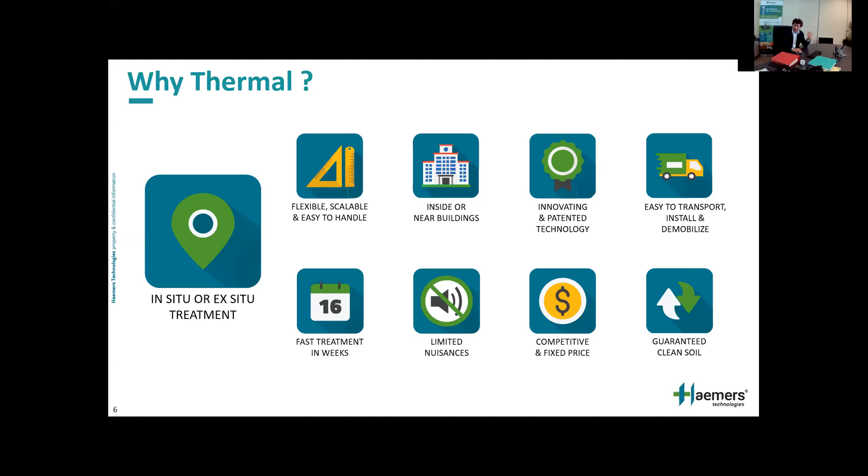The reason why people choose thermal is more or less because of certainty and predictability and the willingness to get rid of the problem quickly and in a definitive manner, not to bother about risk assessment. There is a hell of a lot of remediation that is based on risk, but usually thermal desorption is not. It's about getting rid of the source definitively, not being dependent on any future risk assessment. I think it's a pretty important philosophy in which we operate. You can either choose to manage your contamination or to remediate it definitely. That's the reason why this technology was chosen in the case I will present.

By and large, what is thermal treatment doing, and what can it do in general? It is suitable for treatment of all contaminants except heavy metals, with the exception of mercury. It's focused on treating organics, and 70% of the thermal projects in the world are done with hydrocarbons or PAHs.

Now the technology, how does it work? As you can see on the left-hand side, it's inserting heating elements in the soil. You drill them in; they're steel, and it's actually two pipes, one inside the other, with hot air circulating in the pipe, not in the open air. The outer pipe gets warmer, typically around 400 degrees, and then by conduction, the soil gets warmer and warmer.

When the soil heats up, the contaminants, or at least the volatile or semi-volatile ones, vaporize. They need to be collected, or they would go anywhere else. So there's a separate vapor extraction network, not to be mistaken for soil vapor extraction. It's a vapor extraction at very low negative pressure that recovers those vapors from the soil so they don't condensate back or go elsewhere.

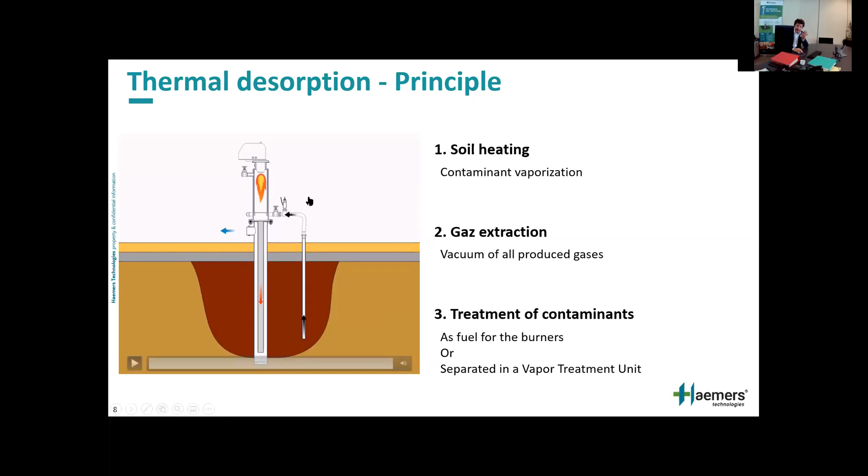That's in a nutshell how the process works and how it's been applied. I'm glad to see that many recent publications have ranked this technology as top, number one, as the most sustainable technology when you take sustainability as a whole—not just carbon footprint, but social aspects, the fact that you can completely reuse the soil, the effectiveness and speed. The overall impact has put this technology as if not the, then at least one of the most sustainable of all.

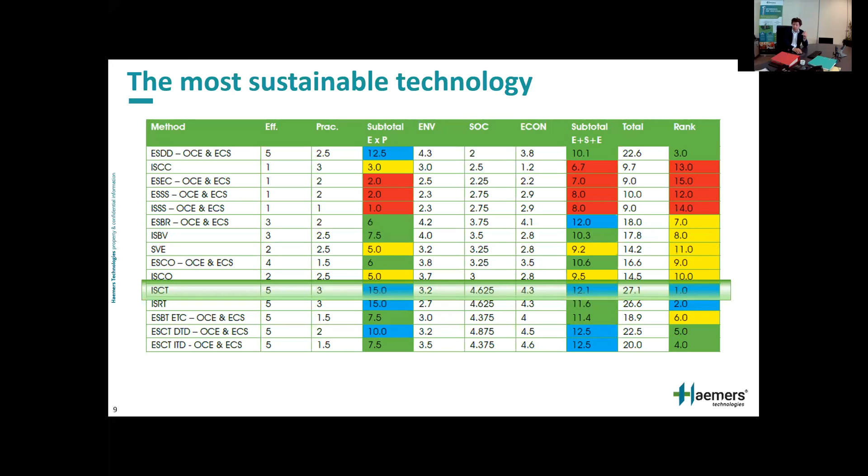A new owner comes in and says, I'm going to buy the house. There is a regulation that says you cannot buy property without looking at the soil, and the government tells you whether you can or cannot buy it. In this case, there was a risk of contamination. They did the investigation, it was contaminated, and remediation needed to be done before the transfer could happen. In this case, a transfer could happen, but a bank guarantee was put in place so the remediation would take place. The choice of thermal was pretty straightforward.

The new owner wanted zero contamination left behind, so there is a level to achieve in the Brussels region, which is, call it by and large, background level. In Italy it's called Tabella A, and here it's category 1. Every country or region has its own qualification for that, but it says if you're below that, we guarantee there will be no further action required and no contamination left behind. So that's essentially what the target was.

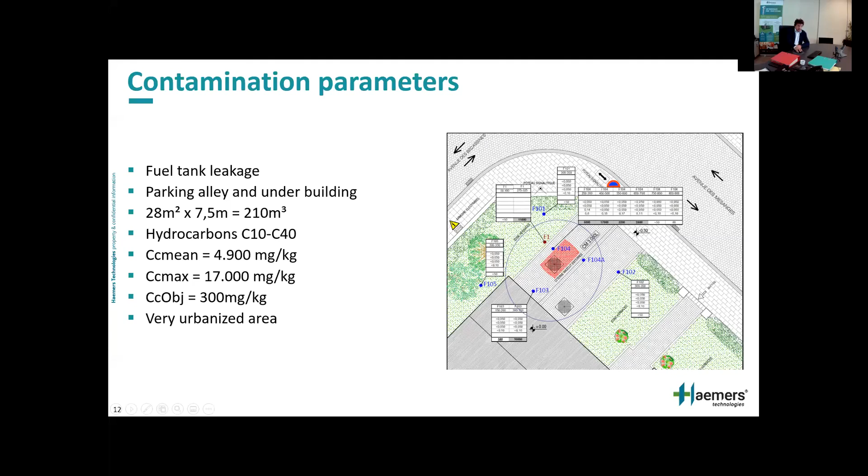So what was the solution design? 16 heating elements, 7.6 meters deep, so a little bit deeper than the lowest contaminated point. The reburn technology, which I briefly introduced a few slides ago. Interdistance, pretty short, 1.5 meter interdistance between each of the heating elements. Why is that important? The closer heating elements are to each other, the faster it goes, and the more effective it is from an energetic standpoint.

Now, of course, the closer you put them together, the more drilling you need to do, so the more expensive it becomes. So there is an optimum, and the optimum is usually close to 1.5 meters if you heat with, let's say, burners. If you start to heat electrically—not to be mistaken with resistive heating, but conductive heating electrically—you have the same rule, but there is not as much electricity available.

Whereas when you work with natural gas, which was the case here, you don't have an issue with availability of energy. There's been some diagonal drilling, meaning there was contamination under the house as well that needed to be removed. So you'll see some of the drillings were done from the outside under the building, and the target temperature was 250. How is that decided?

Essentially by lab tests or kinetic tests, where temperature and residence time are essential to guarantee that there is no, in this case, fuel oil left behind.

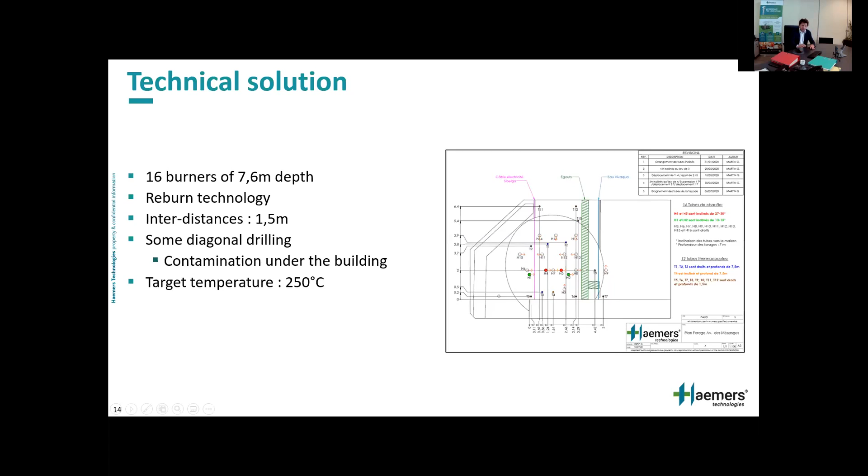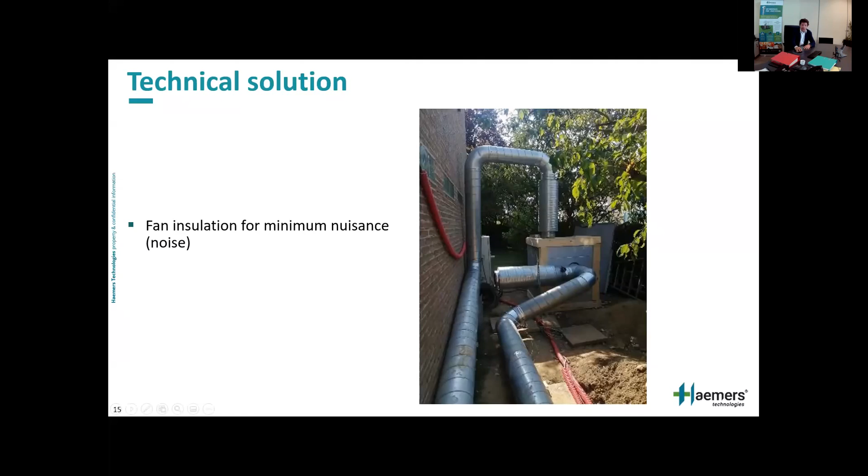Results. How long did it take? As you can see, it started September 16 and ended actually end of October. So it's 45 days of treatment total.

So as you can see here, we stopped, and what you see is that the main driver of remediation progress is temperature. You see the temperature in the soil after a few days already reaching 100 degrees, and in every in situ thermal remediation we see a plateau at about 100 degrees, just the time it takes to vaporize all the water in the soil. During that period, there is also hydrocarbon removal, but the main process is water removal. Once it's dry, you can see temperature going up and up and reaching the target temperature of 250 degrees.

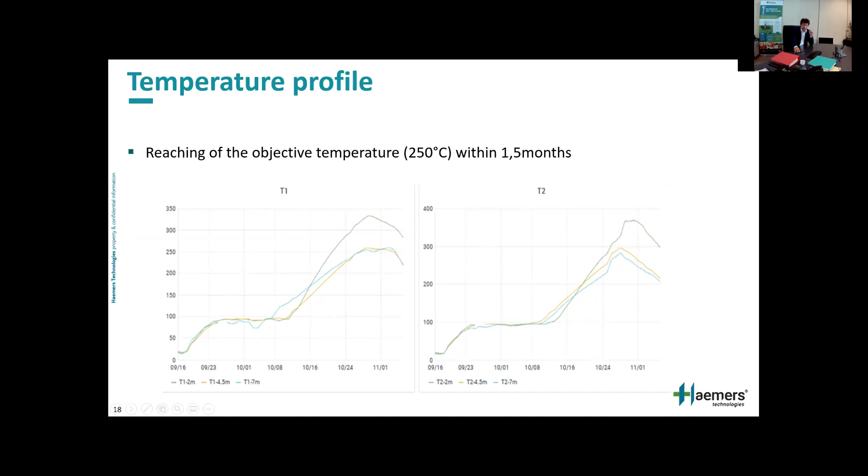Then it's shut down, re-moisturized. Water is put back in place to guarantee that the soil is as it was before, and also for stability reasons. Control sampling is done by an external firm, and done.

Emission controls: there is one single emission, which is the combustion gases, and of course the reburn gases go to one single point, and it has to be checked and measured. We measure it on a continuous basis.

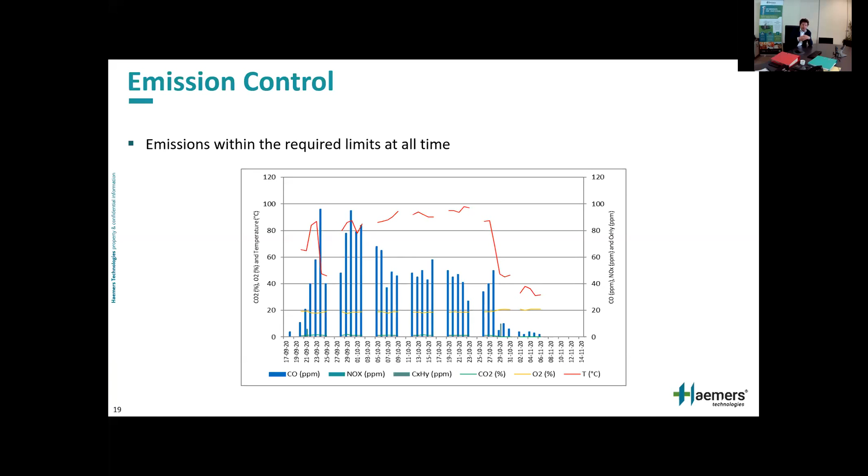The standard emission parameters - carbon monoxide, NOx, SOx, hydrocarbons - were all continuously measured and monitored by the authorities, and they were way below the norm. There's been obviously no complaints, because the environment is very, very urban, with people and kids living in the area. There's no way you could have anything smelly out of that chimney.

So essentially, this was good enough to go back into category 1 - what is also called multifunctional use in the Brussels region - and to have a new owner happy and a former owner happy and released of his liability.

So as a conclusion, in this case, and as in many cases, the thermal desorption was pretty effective on hydrocarbon contaminated soil.

All included - mobilization, heating, validation, and demobilization - was 4 months. So the owners were disturbed for 4 months of their property. There were, to say this, very, very few nuisances in the area - no trucks, no excavation, no dust, no noise.

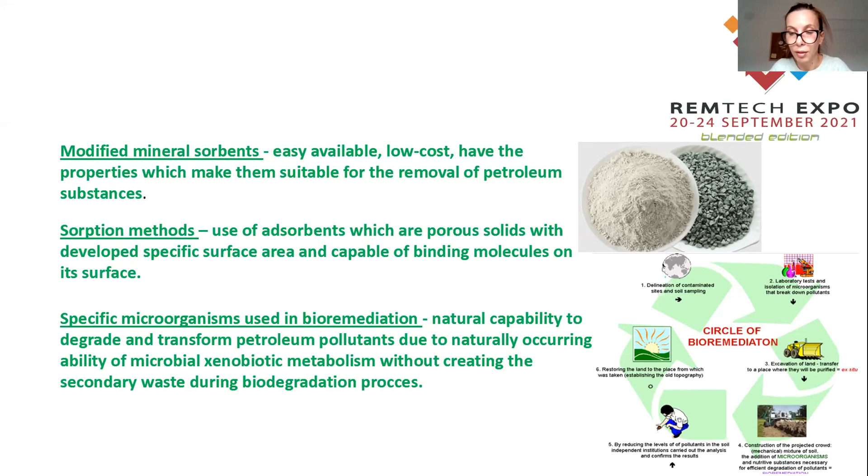So the aim of this study was to investigate the potential application of modified mineral sorbents for the removal of oil from waters. We checked two types of pollutants, crude oil and diesel oil, and two types of natural sorbents.

Organozeolite and bentonite. At the first phase, we checked the adsorption capacity of sorbents for these two types of pollutants. On the second phase, we did the biodegradation and measured capacity for biodegradation by respirometer and GC analysis. On this slide, you can see the small flow chart of this experiment.

So we are using organomineral and we absorb the pollutants onto them. Actually, we put the organomineral into contaminated water, stir it for some period of time, and after that extract the organomineral, and we are expecting that pollutants will be attached to that organomineral. After that, we inoculate that organomineral with biomass of biodegradation microorganisms.

And as you can see here, we have all circulated process, it is all in a loop. We don't have much big waste, because our idea is that we are getting the biomass from the process, and it can be used again in microbial degradation, and we are getting the organozeolite, which can be regenerated and used again in this cycle.

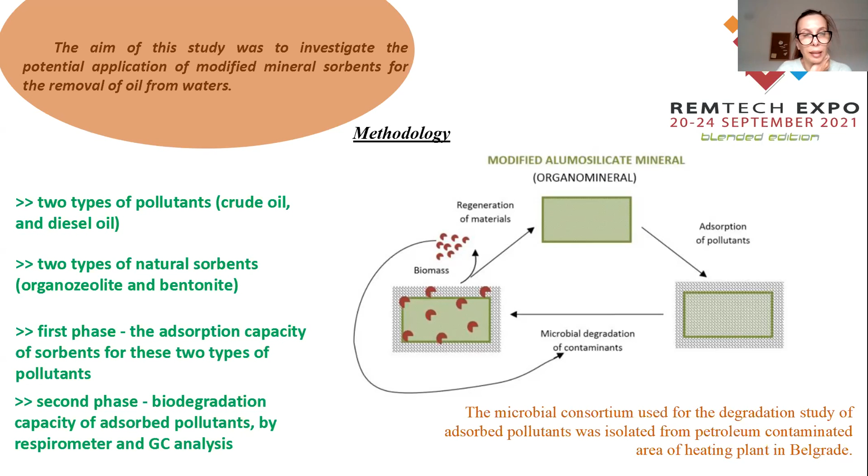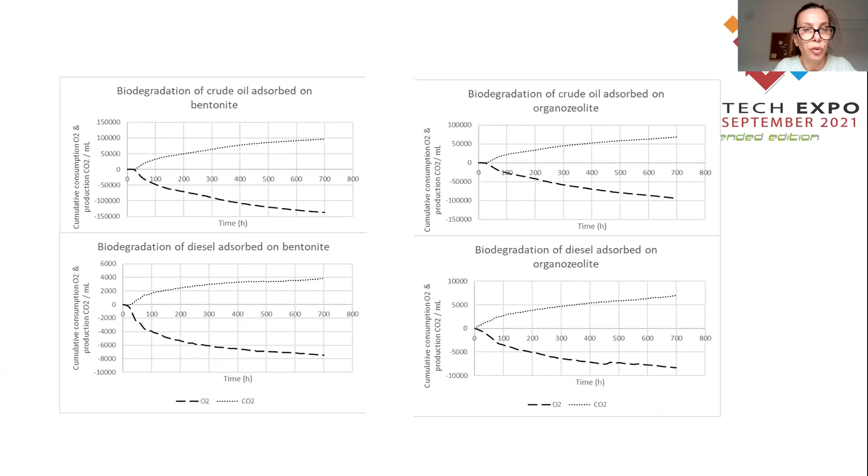So these are the charts prepared from the results from the respirometer, and they are in correlation with the previous table. They are showing the consumption of oxygen and the production of CO2, and we can see the respiration of microbes during this process. And what is important, as I said, this is just our preliminary experiment, and we wanted to check - we didn't know what we were going to get, I have to say.

Because we never used this kind of zeolite and bentonite from Serbia with our microbes. Our microbes are as well isolated from the Serbia area, but it was used for soil bioremediation and without adsorption.

So taking into account those results, we can conclude that this method is maybe more suitable for cleaning diesel oil from contaminated waters, and bentonite as adsorbent gave the best final result of cleaning capacity.

However, we need a lot of further research, and we need to find a good combination of adsorbent and pollutant to find the best match to have the best results, because adsorption properties of this kind of mineral sorbents can be modified, and that is giving us opportunity to modify it for different kinds of pollutants, and to use that way to find a good combination of adsorbent and pollutant.

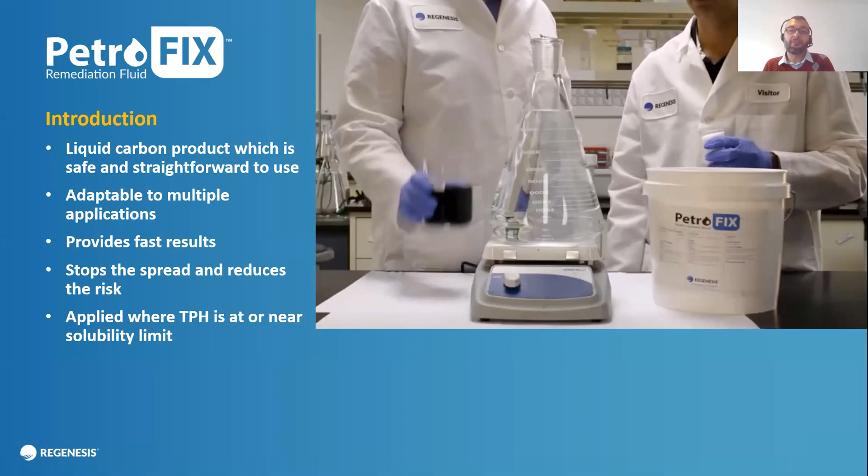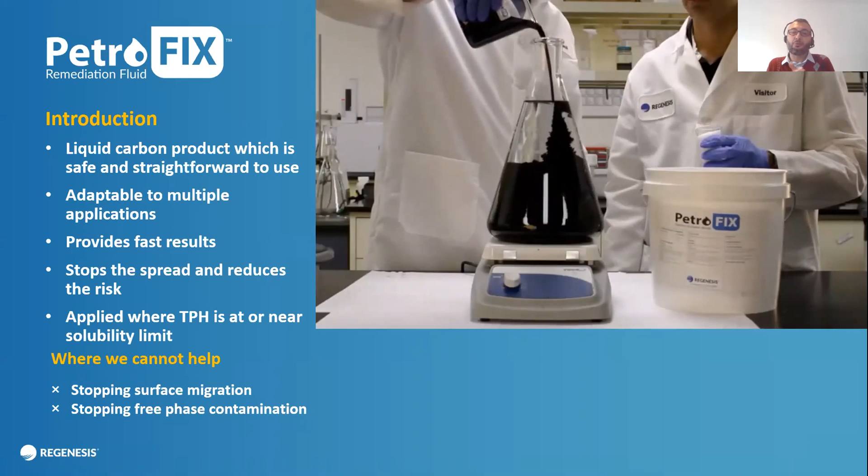So first of all, what are we talking about? We are talking about colloidal particles, very fine particles, 1 to 2 microns of activated carbon, which form a stable suspension in water. So it becomes basically a liquid. This can be applied in the subsurface, and it will move very homogeneously, and then after weeks, it will coat the soil particles.

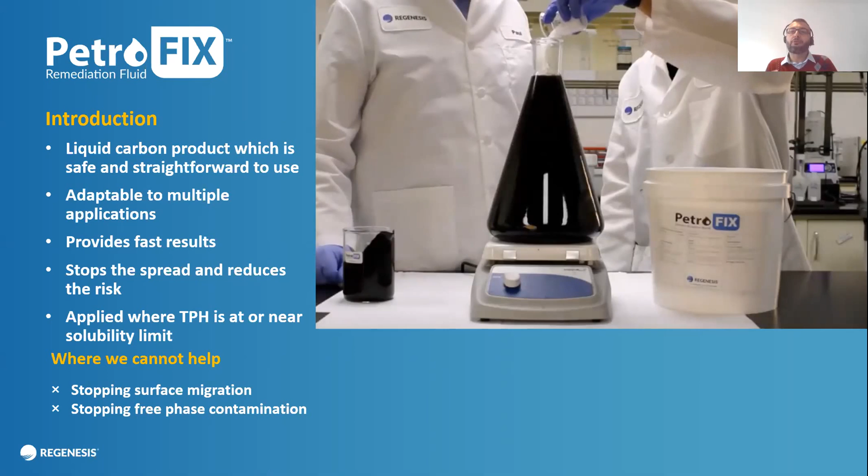From there, being activated carbon, it would sorb the hydrocarbons from the dissolved phase. The sorbed hydrocarbon is then biodegraded, and this biodegradation is promoted also by nitrates and sulfates, electron acceptors, which are included in the blend - this white powder you're seeing now in the video. This biodegradation provides self-regeneration of the Petrofix, so it becomes not consumed during the process and will stay there on the long term.

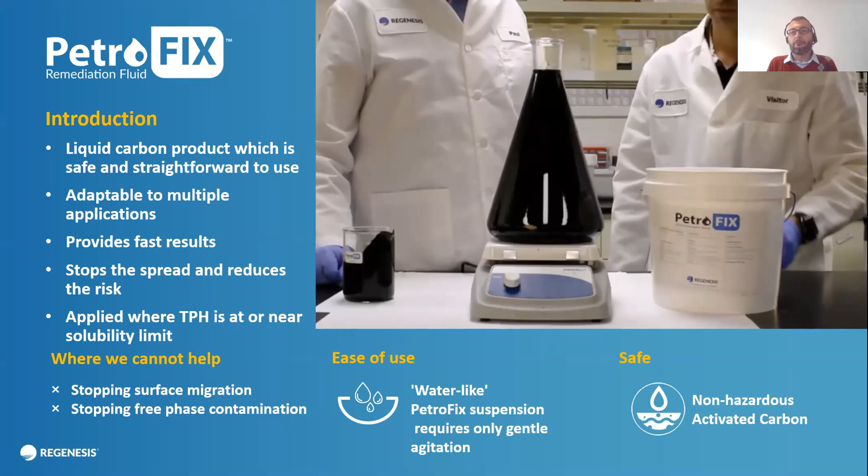This provides an easy and safe way for remediating hydrocarbons, which became very interesting, for example, for traditional sites such as petrol filling stations or other hydrocarbon sites, because it's easy to use, low pressure involved, non-hazardous, compatible with any material, and provides a long-term, completely passive management of remediation without active equipment on site.

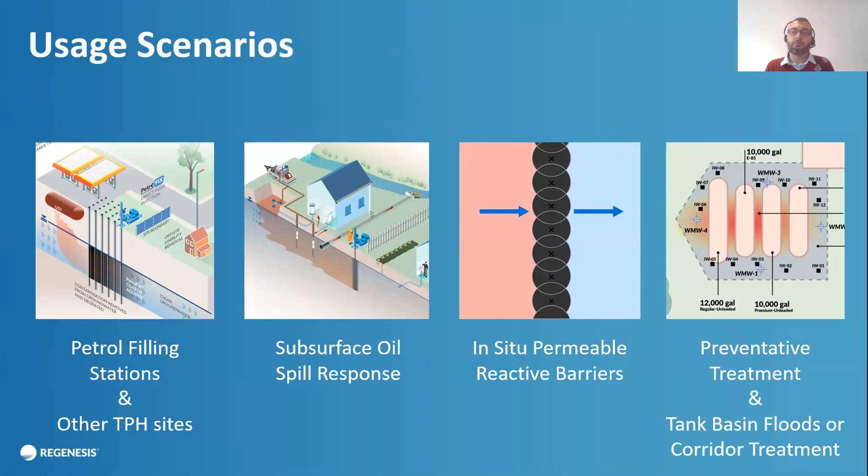Apart from that, increasing interest has been seen in the use of Petrofix for subsurface oil spill response, injectable permeable reactive barriers, and a preventative approach on non-contaminated sites. Those three scenarios are where I would like to focus today, starting with oil spill response scenarios.

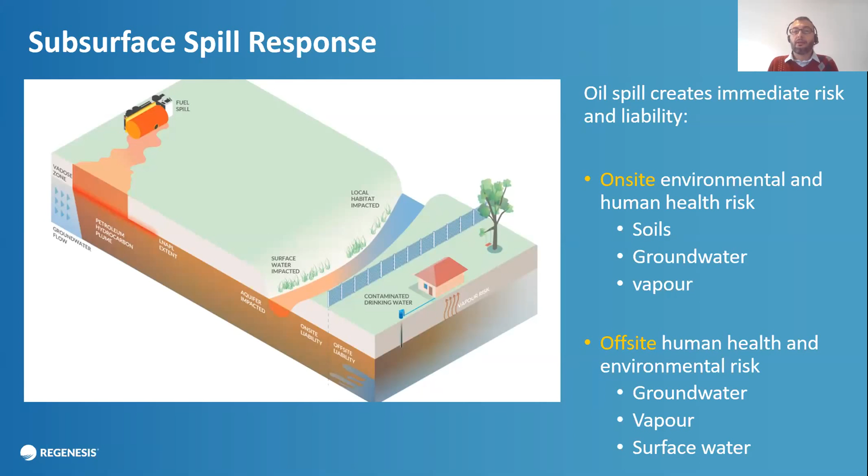Whenever a spill occurs, it is a matter of weeks or a few months before the contamination migrates, and this generates expanding risks and liabilities on site and off site. The primary spill response usually focuses on reducing the scale of the impact and removing the majority of the mass. But after the primary spill response activity, there is usually some residual mass present, which then migrates and continues to spread.

This increases the size of the contamination. And if I deal with that contamination at the remediation stage, which generally comes a few years after the spill occurs, then it's likely that the cost and complexity of this activity will be very high. So from there, the idea is to anticipate this migration, making advantage of Petrofix.

Just after the primary spill response is set up and in place, we can shortly after follow up and manage those risks and liabilities which are still under the migration process. One example could be installing a Petrofix barrier to protect off-site migration or to protect sensitive receptors. The interesting thing about it is that Petrofix does not consume over time, so it's a very long-lasting amendment.

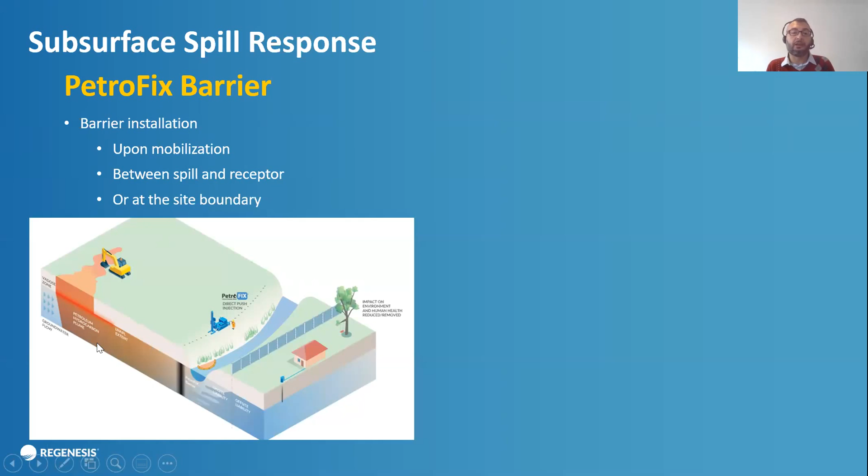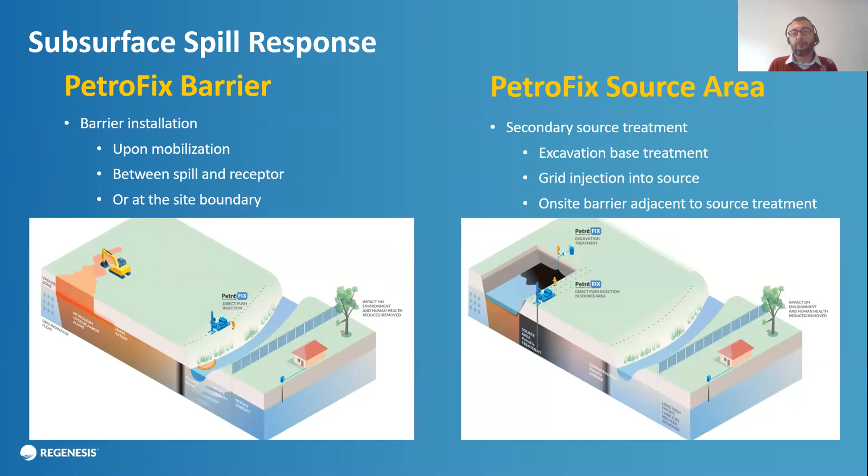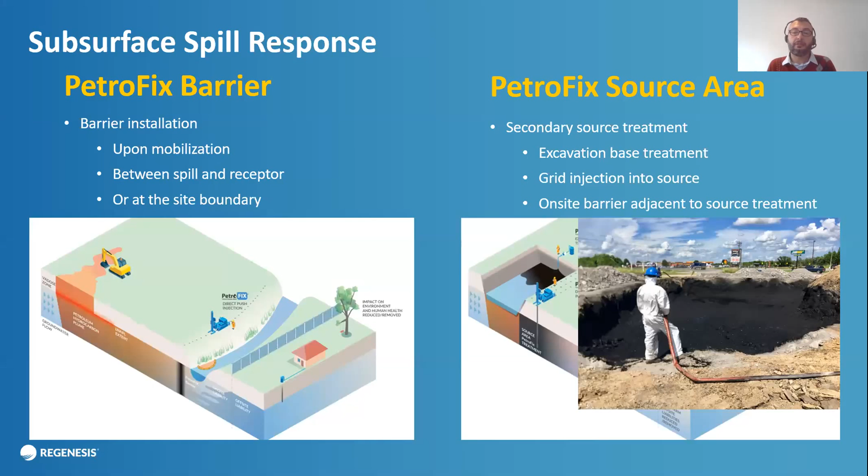Another option could be supporting the source area management with grid injection, or also, for example, with direct application into excavation. For these, it is possible even to apply this as a spray, which makes it very handy and easy to apply. On domestic oil spill scenarios, similar activities could be done.

Another option could be to implement the Petrofix into the pipeline bedding, which frequently becomes a preferential migration pathway for the contaminant to reach sensitive receptors. Here, the fact that Petrofix is a liquid means it can be inserted into those high permeability beddings with low pressure, and it will coat and permeate through the bedding, therefore inhibiting this preferential pathway very easily.

An example of this in Europe comes from SEED Environmental. This is an oil spill response company, probably one of the first in Europe to adopt Petrofix in their spill response package.

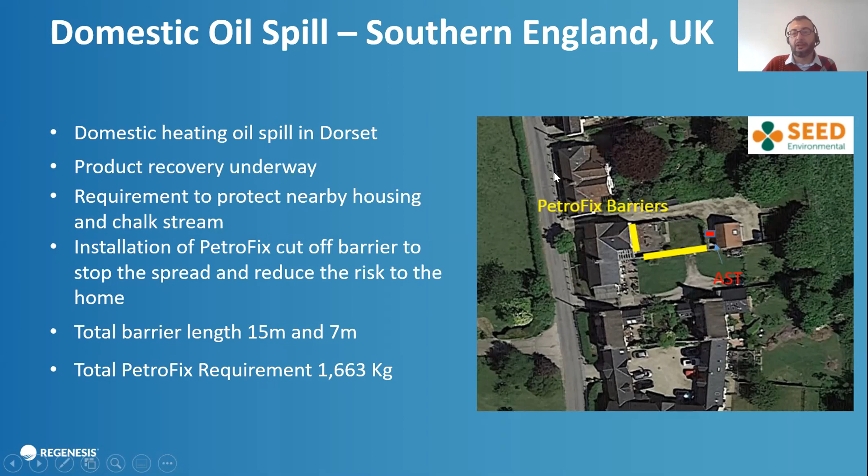In this domestic oil spill, what they did, just a matter of a few months after the spill occurred, was to protect sensitive receptors such as residential housing and a small river flowing down gradient with two Petrofix barriers.

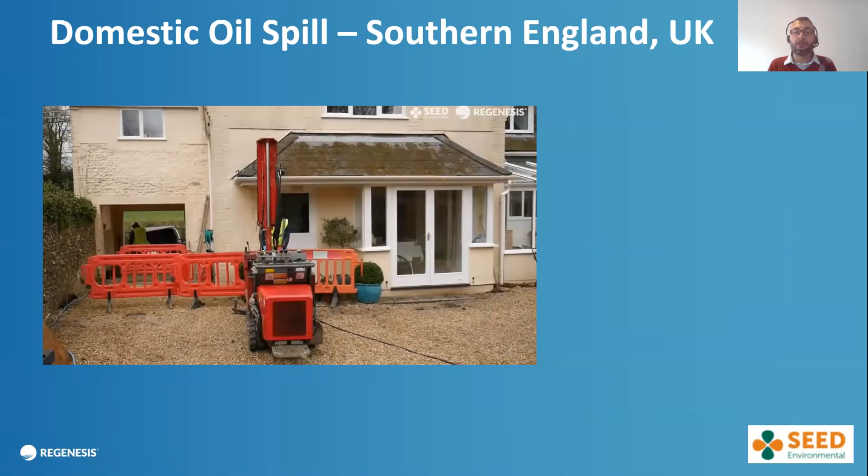And this activity is very simple. For whoever is involved with injection, it can be done via direct push, so no excavation involved, very low interference with surrounding ongoing activities, and no issues with accessibility in small areas.

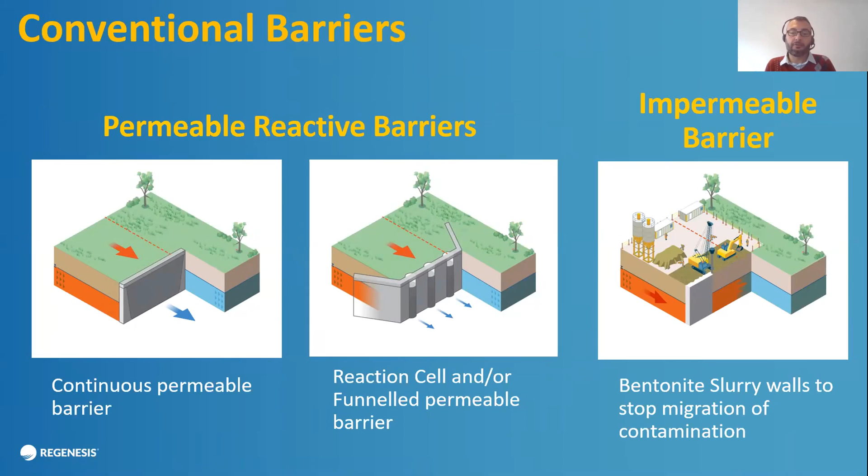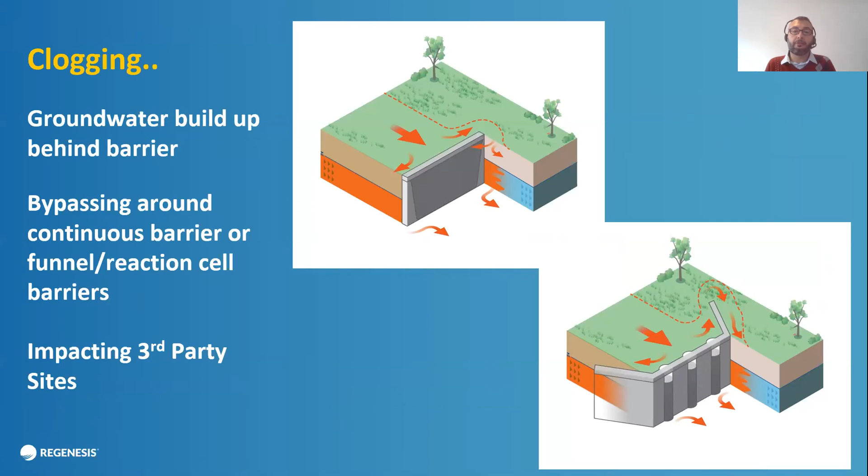Let's get now to the second scenario, which is the use of Petrofix for a so-called injectable permeable reactive barrier. Conventional barriers such as permeable or impermeable barriers are frequently used to cut off off-site migration, to contain a plume, or to confine source areas or highly impacted areas. Those usually become a very impactful intervention, and it's easy that they come to high cost. On top of this, the fact that I replace natural soil with reagent material means that I manipulate the hydrogeology.

With that, it is a potential issue that they can suffer from clogging, from bypass processes. Converting this into an injectable barrier solution provides the fact that I leave the natural soil in place, so I do not modify the natural hydrogeology. The flux and transport of contaminants will remain unchanged, and the solution, much easier especially for big sizes, can be much more affordable economically. The fact that I can use Petrofix for such scenarios provides the advantage that it's a liquid, so it's very easy to inject and distribute homogeneously. It's very likely that I can create a very continuous barrier, which is what I need for this kind of treatment. And also, because it lasts long term, I don't need to go back on site, not even after years of time. This Petrofix will manage the plume on the long term.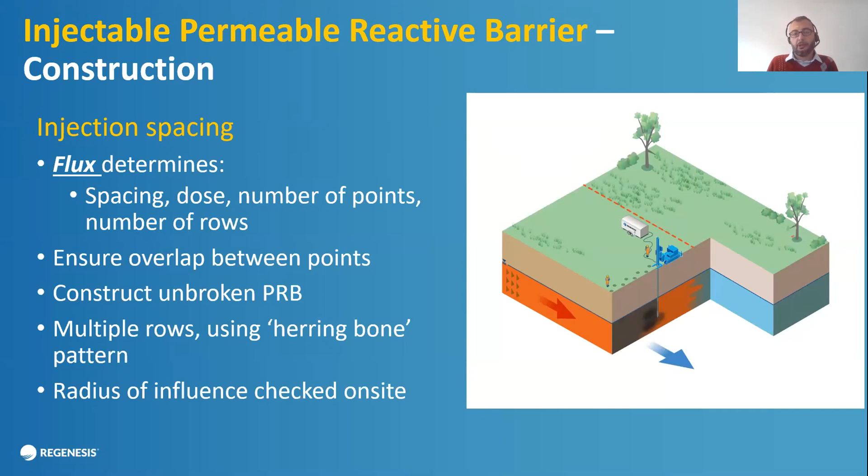On such a scenario, another example comes from the UK. This is a redevelopment site. The site was suffering from contamination coming from up gradient, from another contaminated site. The builder needed to protect their lot to avoid any risk for the new residential and commercial housing. The primary idea was initially to build a slurry wall, but the size, almost 1 kilometer, made this solution prohibitive for construction and also for long-term maintenance, because there is a need to maintain the groundwater level stable and avoid any build-up up gradient. So this was converted into a much easier Petrofix injectable barrier. This was a much more affordable process, and on top of this, the interference with building activities on site was minimal, so the two activities could proceed absolutely in parallel.

Let's go quickly to the third and last scenario I'd like to show you today. This is preventative treatment. Preventative means that I apply Petrofix in areas which today are non-contaminated. This comes from the recognition that whenever an oil spill occurs, it is likely that the majority of the mass will go and sit in tank or pipeline bedding, into service corridors. These will soon form primary and secondary sources, which will then spread into the surrounding soil and groundwater environment. So the idea is that any area at risk of potential contamination, such as UST bedding, above-ground tanks, pipelines, or any service corridors, could receive an application of Petrofix up front.

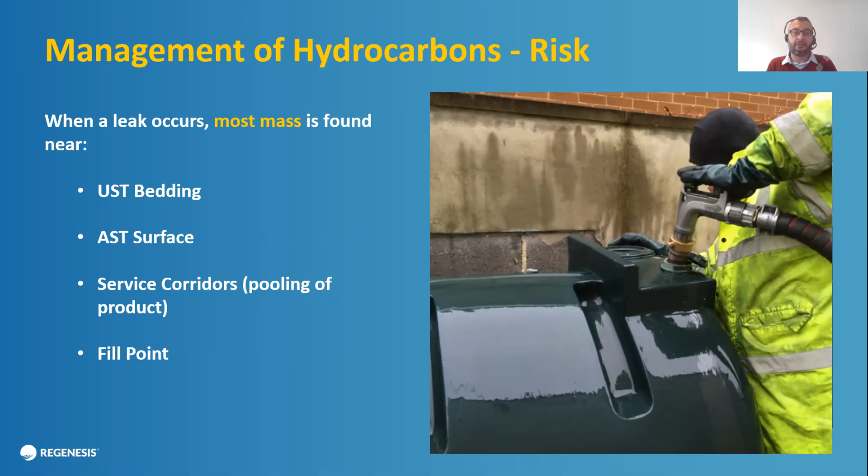Here, the advantage is that Petrofix, again being a liquid, can be spread and will distribute homogeneously in those high permeability backfilling materials, coating all the surface. Staying there on the very long term, whenever a spill occurs over time, even many years later, the activated carbon will still remain active to manage this spill. Another option is whenever, for any reason, I need to make an excavation, before backfilling I can spray apply the Petrofix on the walls and the bottom of the excavation. This will ensure that over time, the backfilling material will not risk becoming recontaminated again.

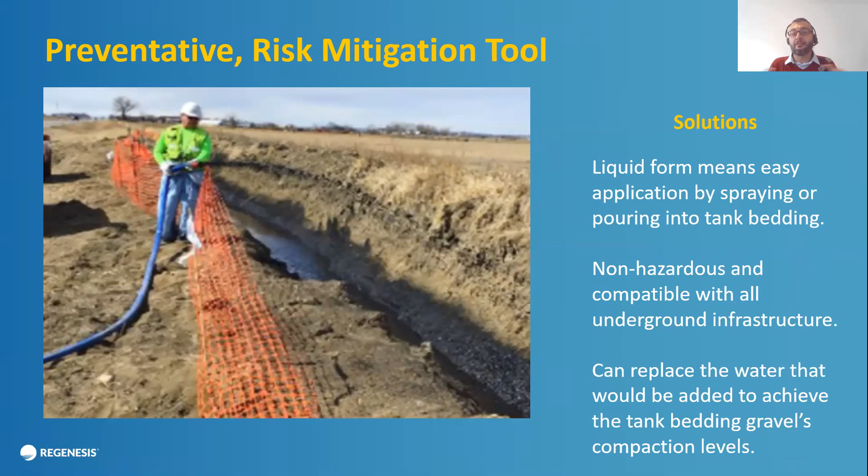And this is exactly what a client of ours did in Germany. There is a chemical plant. They needed to install a new underground service pipeline, which was passing through contaminated soil that could not be entirely remediated. So they made the excavation for installing this pipeline, and the excavation remained surrounded by contaminated soil and underlying contaminated groundwater, which over time would probably recontaminate the backfilling material of this pipeline, creating a preferential migration pathway, because this backfilling material is more permeable than the natural soil.

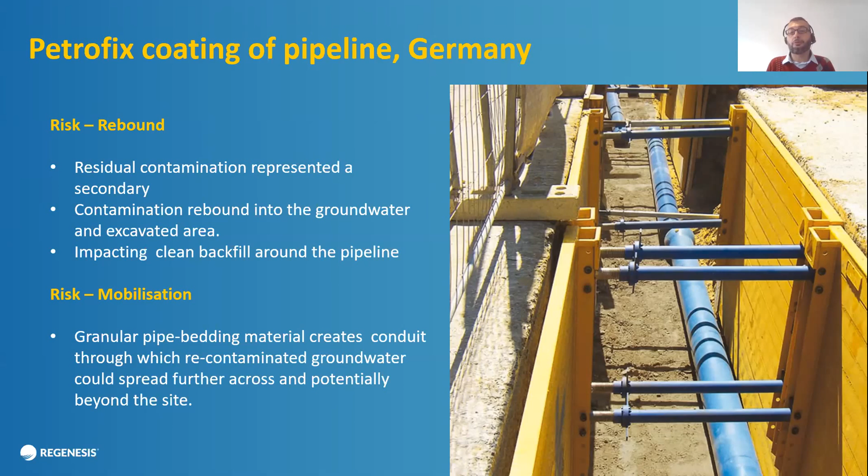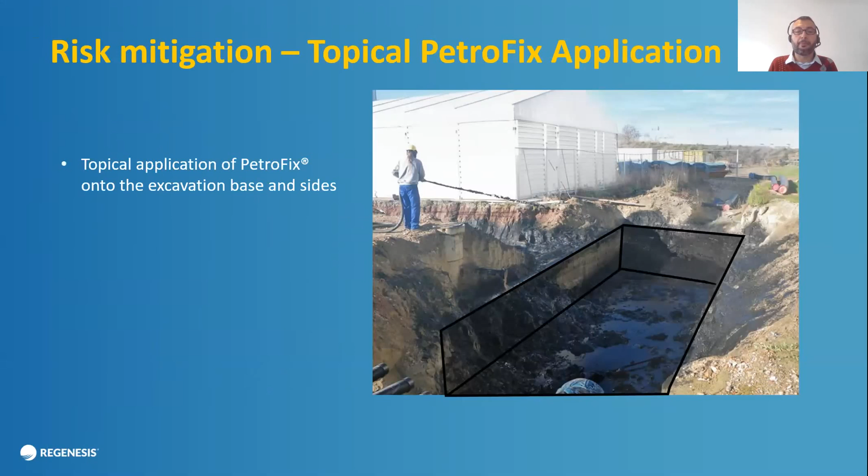So in order to avoid this, what has been done is spray applying the Petrofix on the walls and the bottom just before the backfilling. And this activity is very simple. It lasts just a few hours, and then immediately the backfilling can be put in place. It's just mixing the product with additional water, and then applying it with traditional equipment.

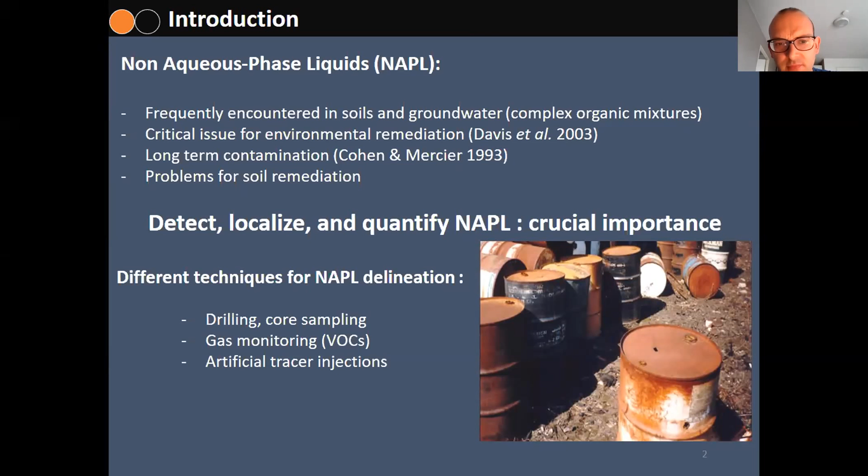Soil and groundwater are often contaminated by complex organic mixtures such as non-aqueous phase liquids, or NAPL. These liquids are recognized as a critical issue in environmental remediation and can persist for centuries in soil. It is crucial to detect, localize, and quantify NAPL. Traditionally, NAPL contamination has been estimated using drilling or core sampling, but this is time-consuming and expensive. Gas monitoring is also found in the literature, but is also time-consuming. Finally, artificial tracer injections into soil have been used, but this is also time-consuming and harmful for the environment. So new approaches are needed to detect NAPL in soil.

Radon, specifically 222Rn, can be used as a NAPL tracer. It is a natural component found in soils, a noble gas with a half-life of 3.82 days. It is easy to use because it has an affinity with the organic phase. When groundwater containing radon migrates toward a residual NAPL contamination area, a local radon deficit is observed. This radon deficit close to a NAPL-contaminated zone depends on the radon partitioning coefficient, which is of pivotal importance for quantifying NAPL in soil.

This partitioning coefficient can vary with different aspects, such as the chemical composition of the NAPL. Indeed, if it's diesel or gasoline in soil, the chemical composition will be different and the partition coefficient can vary. Evolution over time, such as evaporation or degradation of NAPL, can also cause variation in the partitioning coefficient. But no study in the literature has dealt with the degradation of NAPL and its effect on the partition coefficient.

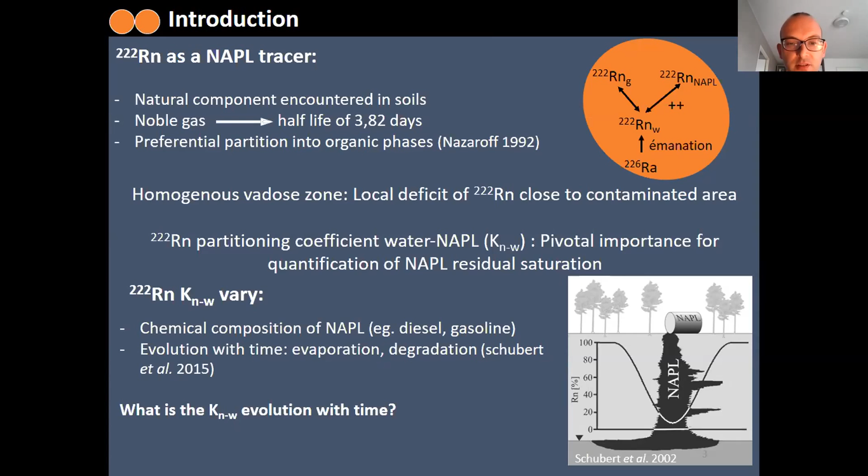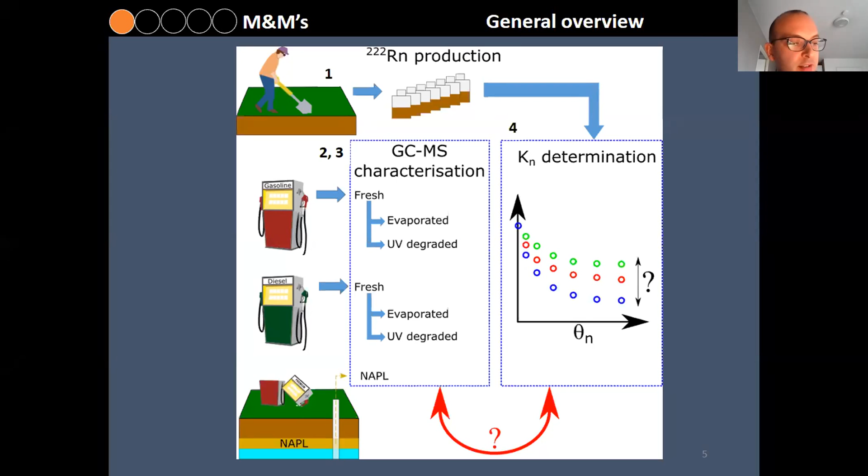To reach this goal, we performed batch experiments to determine the radon production. Fresh diesel and gasoline were sampled at several stations and characterized using GCMS to determine their molecular composition. The fresh NAPLs were then degraded through evaporation and UV exposure. Finally, the water-NAPL partitioning coefficient, KNW, was determined for both fresh and degraded complex NAPL using batch experiments.

To determine radon production in the soil, two sets of batches consisting of 6 bottles each, with different water contents, were prepared. The soil came from the same area—a pond in front of the laboratory—but two different depths were used, 20 centimeters and 70 centimeters, and radon production was calculated from these. All experiments were performed in 1-liter glass bottles, sealed with rubber stoppers to prevent any leakage. A mass of soil was inserted into each bottle, and humidification was carried out at different water contents ranging from 0 to 0.2.

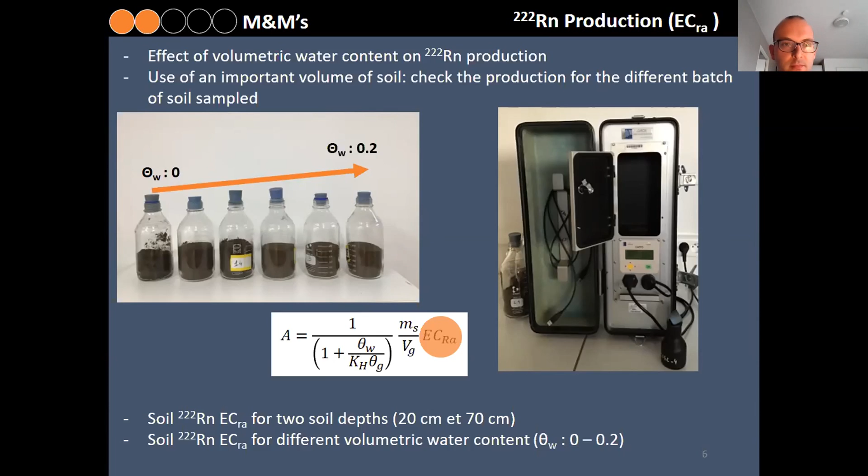After that, we realized the degradation of the NAPL. First, we bought some fresh gasoline and fresh diesel from a fuel station, and we degraded it in two ways. First, evaporation, which was just evaporation under the hood to remove the volatile compounds. And the photodegradation was carried out in a photolytic reactor, which consists of a glass bottle, as we can see in the photo, with a UV light placed close to the reactor. Everything was wrapped in aluminum foil, and the reaction occurred for 2 hours.

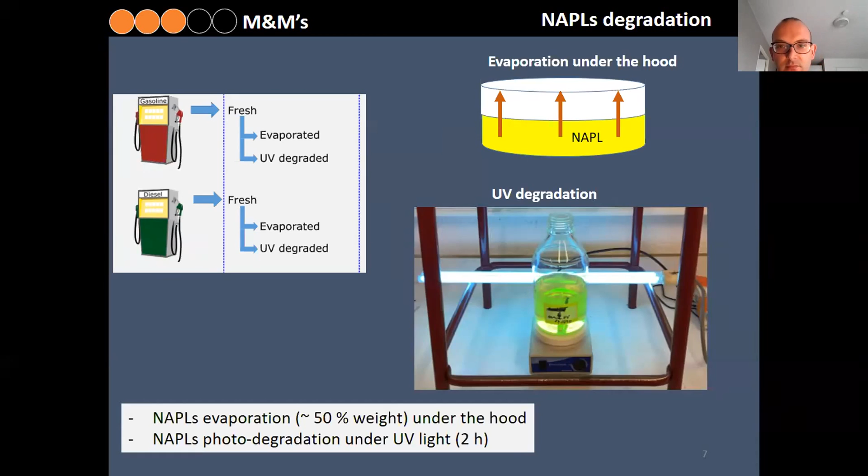To give more information about the molecular composition of the fresh and degraded NAPLs, we used GCMS, in two ways: liquid GCMS and headspace GCMS. The headspace GCMS allows us to detect the most volatile compounds and gives good separation, so it was suitable for gasoline fuel compounds. The liquid GCMS was also suitable, as diesel contains heavy hydrocarbons that are easily detectable with this technique.

After that, in order to get information about the partitioning coefficient of fresh and degraded NAPLs, we did soil batch experiments for the production of radon. We put the same soil inside the bottles and humidified all the batches to the same water content. Then we introduced the NAPL inside the bottle at different contents. After 20 days of equilibration, we measured the batch activity by removing the gas inside the bottle using a scintillation flask, and from that we got the radon activity for each batch.

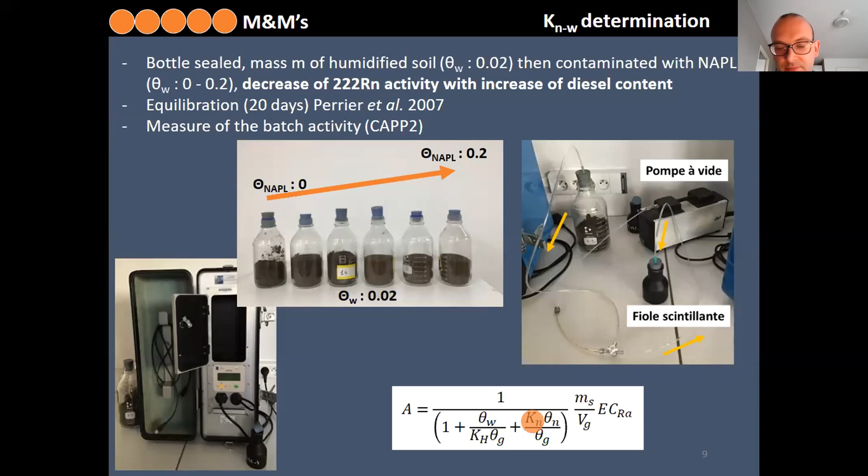So concerning the results, the first figure gives the production of radon for the different batches for the soil at 2 different depths on the soil profile, at 20 centimeters and 70 centimeters. What we can see is a rapid increase of the radon activity with the humidification of the batches, and after that we get an equilibrium at both depths. However, at 70 centimeters, the radon production is lower than at 20 centimeters.

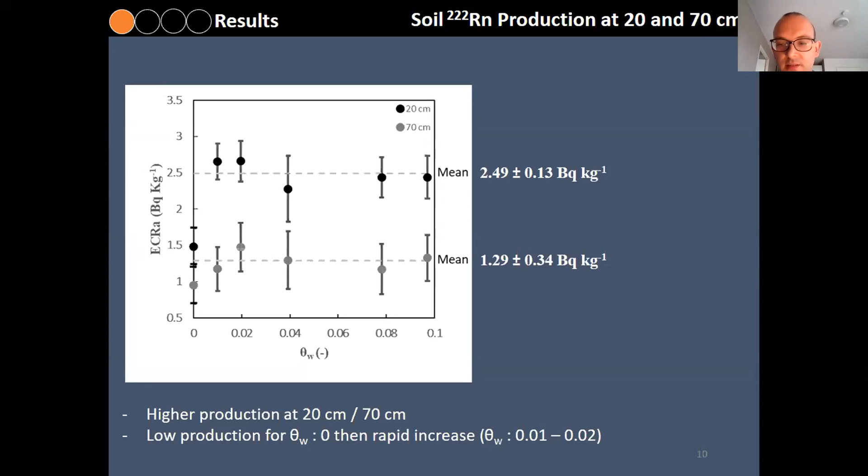Here we have the results concerning the radon activity that gives us the partition coefficient for the different NAPLs. So here we have the diesel, on the left the fresh diesel. The points correspond to the different batches, and the curve corresponds to the modeling given by the equation of the activity. We fit it at the best to get finally the partitioning coefficient. For the fresh diesel, the partitioning coefficient is 60.7.

And when we degrade the diesel - under UV in the middle, and evaporated on the right - in the middle we can see an increase of the partition coefficient, and at the opposite, when we evaporate, we have a decrease of the partitioning coefficient. So we can see that we have a variation of the partitioning coefficient between fresh and degraded diesel.

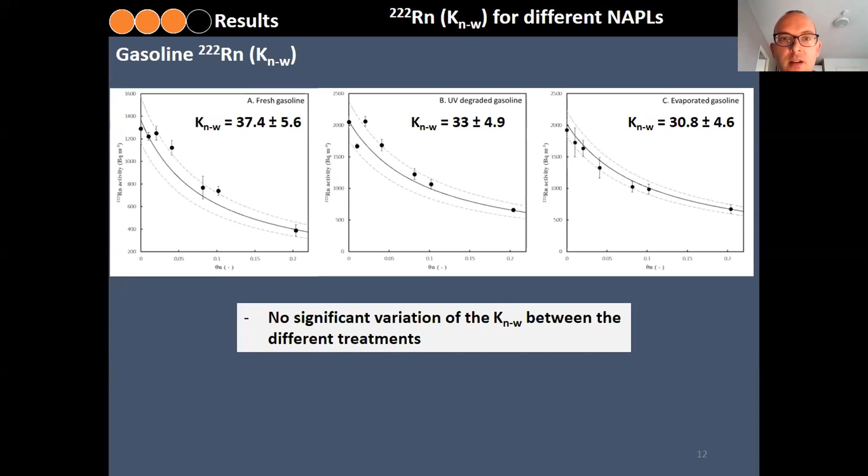Concerning the gasoline, we have the same behavior: a decrease of the activity with the increase of the NAPL. But the variation of the partitioning coefficient is lower. We do not have a significant variation between the fresh and the degraded gasoline.

So here we have the GCMS results, the headspace GCMS results - up top the fresh diesel, in the middle the UV degraded diesel, and lower the evaporated diesel. What we can see is alkanes for the fresh diesel, and some other cyclic hydrocarbons. When we degrade the NAPL under UV, we have the same peaks; we don't see the disappearance of any peaks, but the intensity of the peaks is lower. What we can see is that the UV degraded diesel is about 73% of the fresh diesel regarding the intensity of the peaks.

Concerning the evaporated NAPL, we have a strong modification of the chromatogram pattern. As we can see, the beginning of the chromatogram just disappeared, and we lost about 12 minutes of the chromatogram pattern, because of the evaporation of the most volatile compounds. When we check the literature for the partition coefficient of some molecular compounds, we can see that the beginning of the chromatogram pattern has high partition coefficients for compounds such as aromatics and cyclic hydrocarbons, and that could explain the diminution of the coefficient partitioning for the evaporated diesel compared to the fresh diesel.

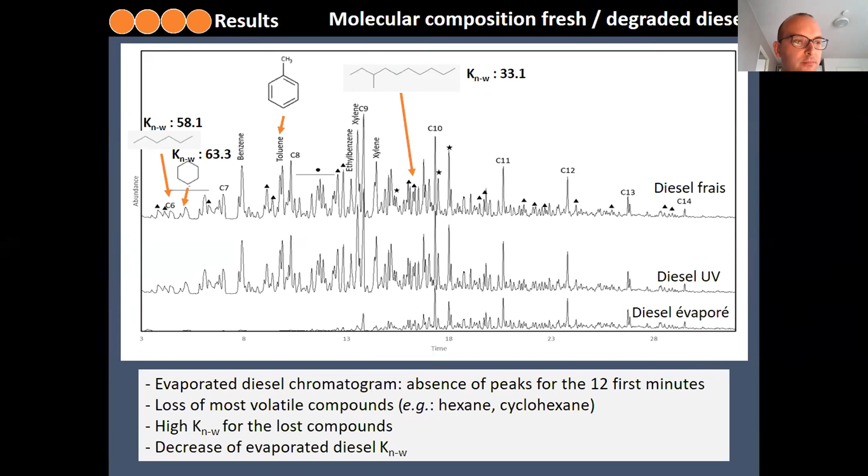So what we can say about this study is that we studied the variation of the partitioning coefficients for different fresh diesels, so NAPLs - it was diesel and gasoline - and the mixture degradation under evaporation and photooxidation.

The results show different partitioning coefficients, as we can see, for the fresh diesel and the gasoline, and it was similar to what we recorded in the literature.

However, we have an effect of the degradation on the partition coefficient for the diesel, but not for the gasoline. And what we can see is that when we lost the beginning of the chromatogram, we have all the high coefficient partitioning for those compounds.

That could explain the decrease of the coefficient partitioning for the evaporated diesel.

Concerning the molecular characterization, there is no variation of the pattern between the fresh and UV diesel. However, we lost, as I said, the beginning of the chromatogram for the evaporated diesel.

So this coefficient partition is of pivotal importance when we deal with quantification of NAPL in the soil with this technique, as this takes place in the calculation of the residual saturation.

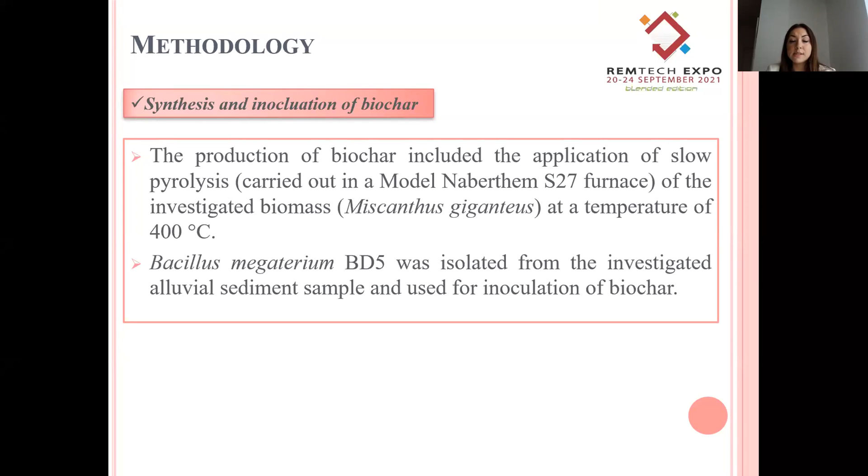And Bacillus megaterium was isolated from the investigated alluvial sediment sample and used for inoculation of the biochar.

Characterization of alluvial sediment and biochar: organic matter content of the alluvial Danube sediment was determined by standard methods.

Total organic carbon of the investigated alluvial sediment was determined by a total organic carbon analyzer.

Specific surface area, average pore diameter, and pore volume of all investigated adsorbents were determined using nitrogen adsorption-desorption analysis with an analyzer for characterization of porous and powdered materials.

Carbon and oxygen content on the surface of all investigated adsorbents were determined by scanning electron microscopy with energy dispersive X-ray spectrometry.

In this picture, we can see the column experiment with sediment, sandy aquifer material, and inoculated biochar.

The column was filled with sandy aquifer material and inoculated biochar.

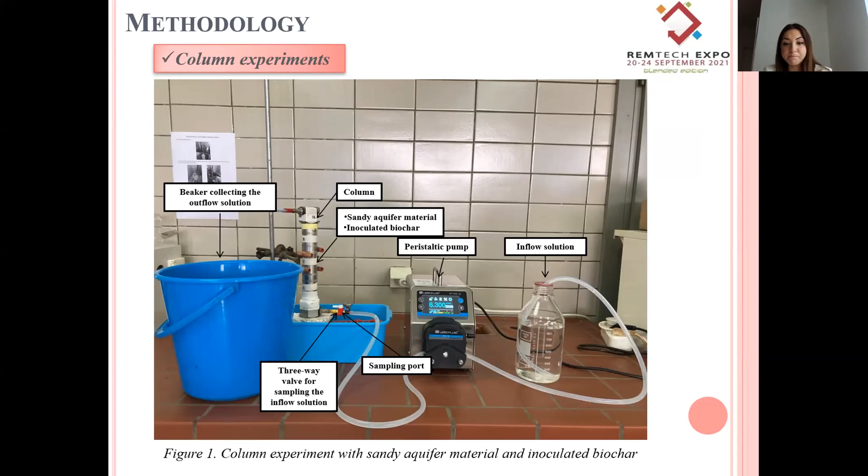Results: physicochemical properties of the used adsorbents showed that higher pore volume and carbon content were observed.

This was observed for biochar originating from Miscanthus giganteus compared to the alluvial Danube sediment.

Total organic carbon for the Danube alluvial sediment was 1.02 milligrams per gram. The Danube alluvial sediment is highly permeable soil, with grain size distribution including sand particles, fine sand, and clay.

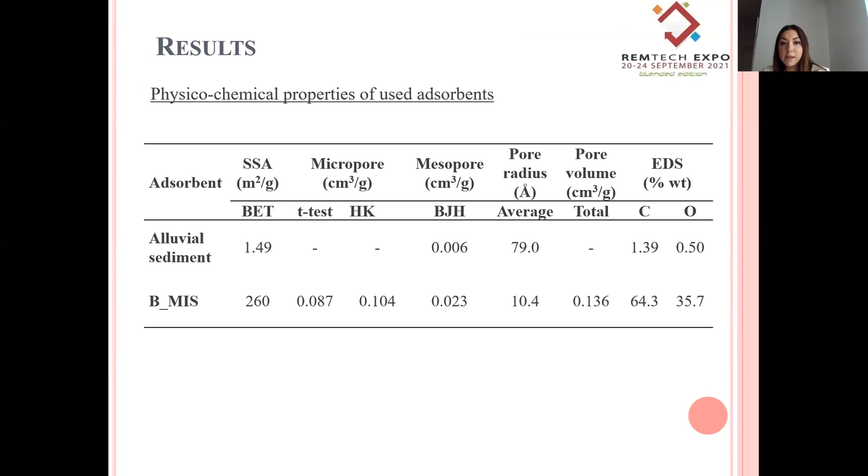Sand particles make up more than 65%, fine sand particles are 15.5%, and clay is about 10%.

This shows the absence of physical non-equilibrium processes in the porous media.

In this table, we can see transport parameters for the investigated organic compounds obtained through a column filled with alluvial Danube sediment, without and in the presence of inoculated biochar.

The column experiment with alluvial sediment showed increasing retention time with increasing molecular hydrophobicity.

The column experiment with alluvial sediment and inoculated biochar showed increasing retardation of both organic compounds with addition of inoculated biochar.

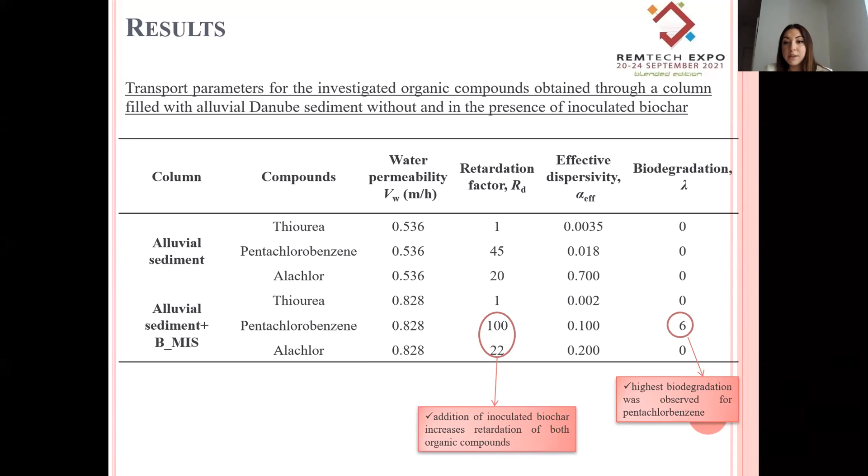The highest biodegradation was observed for pentachlorobenzene, but for alachlor, biodegradation was not observed.

Conclusions: higher pore volume and carbon content were measured for biochars than from alluvial sediment.

Transport of organic compounds through the sediment column showed that retention time increased with increase in molecular hydrophobicity, and the addition of inoculated biochar increases retardation of both organic compounds.

The highest biodegradation was observed for pentachlorobenzene, lambda is 6, which could be a consequence of high adsorption on biochar and biosorption, while for alachlor biodegradation was not observed during any of the experiments.

Overall, the results indicated that the addition of inoculated biochar to contaminated sediments has the potential as a remediation technique to inhibit the leaching of pollutants to groundwaters. Thank you for your attention.

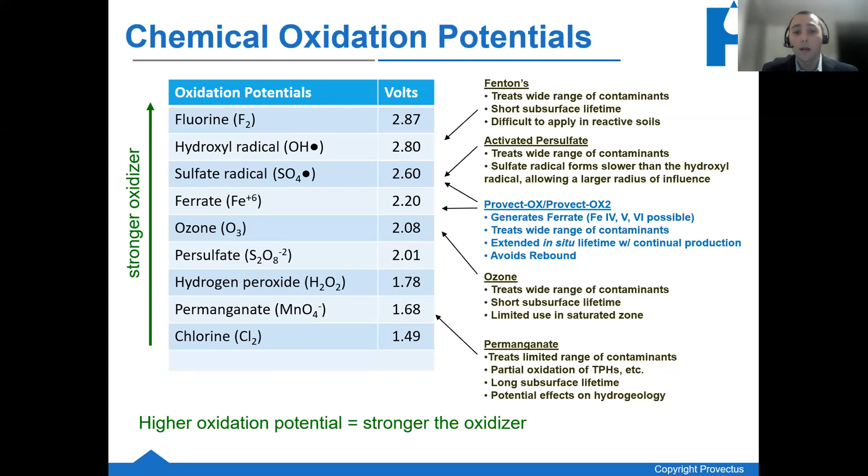As you move down the chart, you can see lower oxidation potentials for things like ozone, hydrogen peroxide, and permanganate. So how do these oxidation potentials relate to contaminant destruction? In the chart on the right, we can see our longer chain hydrocarbons like PAHs, DRO, and GRO require an oxidation potential of at least 2.5 volts to successfully remediate them.

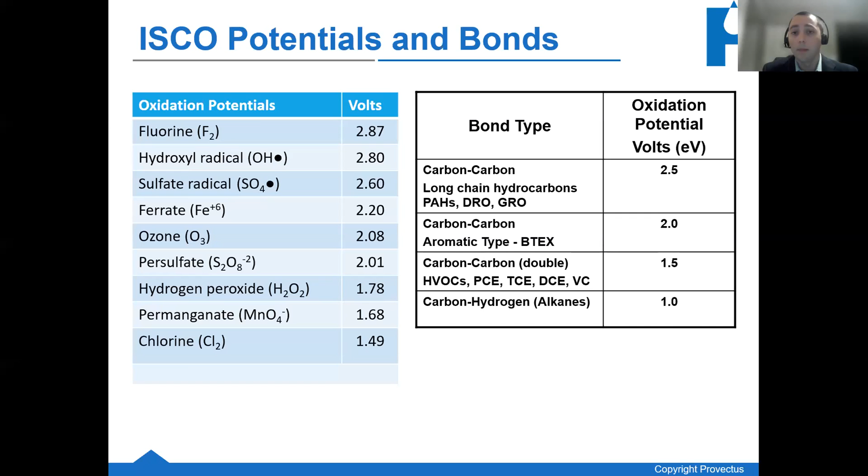In order to generate that much energy, you need to be utilizing at least the sulfate radical or the hydroxyl radical. Given some of the drawbacks for the hydroxyl radical, that's often why we're recommending persulfate to generate the sulfate radical. Some other common contaminants such as BTEX require less energy, around 2.0 volts, and chlorinated solvents down towards the bottom are about 1.5 volts. But if you're targeting those longer chain hydrocarbons, other common technologies like permanganate, ozone, or hydrogen peroxide may not generate enough energy to successfully remediate them.

Now talking about the three main limitations I see with ISCO, the first is non-beneficial consumption. When I think about the total oxidant required for a project site, this is really a mathematical formula of two components. The first is your stoichiometric demand of your contaminants. Assuming a well-delineated site where you understand soil and groundwater concentrations, you can easily calculate this for any oxidant. For example, if you have 1 pound of benzene in the subsurface, that requires approximately 50 pounds of persulfate to remediate.

The second half is harder to quantify, and that's what I call the non-beneficial consumption. This is made up of things like soil oxidant demand, metals, organic carbon, and potentially decomposition of the oxidant if using something like peroxide. The best way to quantify this is through a TOD test, a total oxidant demand test, which helps us look at all those other things besides the contaminants in order to quantify how much oxidant we need.

This is something we strongly recommend here at Provectus. Though we realize a lot of project sites are successfully remediated every day without this test being done, it's essentially a bit like gambling, as I've seen TOD tests range between 2 to 3 grams per kilogram for a site, all the way up to 30, 40, 50 grams per kilogram. If you assume too low of an oxidant demand, you may be underdosing your site. If you assume too high, you may be putting in more material than required, costing your client more money.

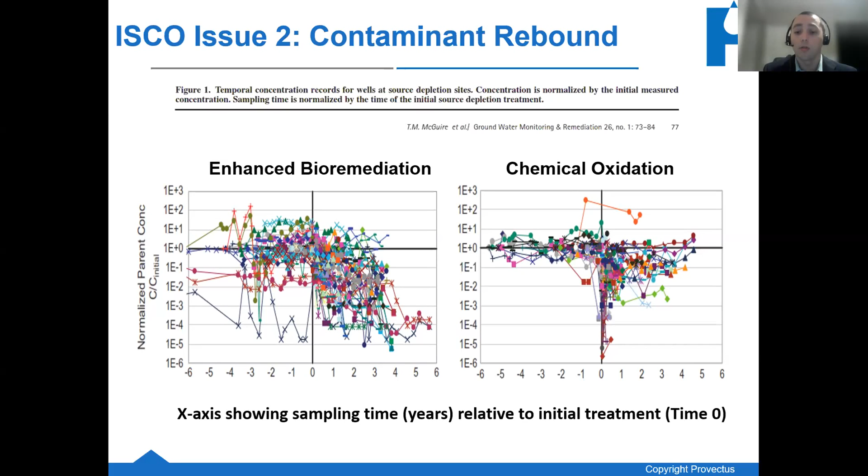As our timeline progresses, we see more and more reductions occurring. This corresponds with our understanding of bioremediation project sites, being that they tend to be a lot slower on site. The real sweet spot here would be if we could combine ISCO with bioremediation in order to get those rapid upfront reductions, as well as the sustained reductions on the back end through bioremediation.

The third issue I see with ISCO is related to the longevity of the reagents. Let's think about a hypothetical project site, where a plume's been leaking in the subsurface for 2, 3, 4 decades. Over time, that plume gets delineated, technologies get evaluated, a RAP gets submitted, and finally it's time to implement what's been approved, which may be a chemical oxidation technology. Over those decades, that plume has had the opportunity to migrate into very fine grained pore spaces in the subsurface. If we put an oxidant in that may only last minutes to hours, maybe a couple months on the high end, that may not reach every potential pore space in the subsurface.

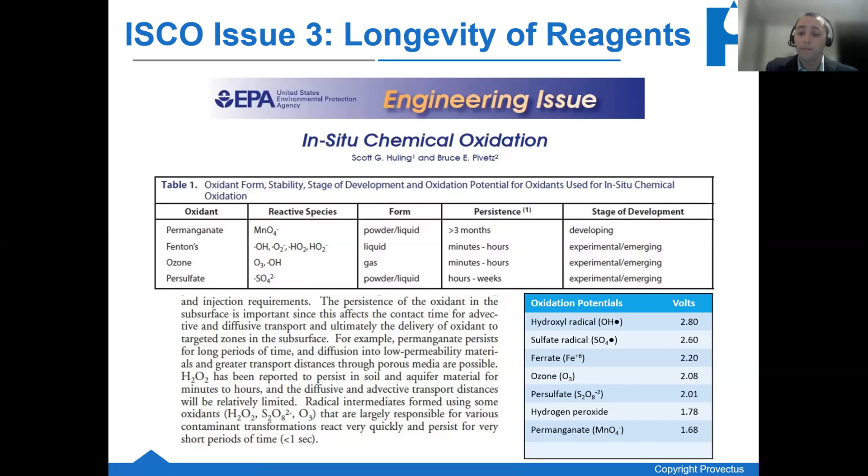Here at Provectus, we offer two technologies known as Provect-OX and Provect-OX 2. Provect-OX is sodium persulfate, and Provect-OX 2 is sodium and potassium persulfate, and both technologies come with a ferric iron activator. These technologies yield chemical oxidation via the sulfate radical as well as ferrate.

Following the application, they will alter the initial background reducing conditions, create aerobic conditions for oxidation, and as that attenuates back towards the reducing baseline conditions, the residual sulfate and iron reduction processes will remain in place to help sustain bioremediation on the back end.

As I mentioned, Provect-OX 2 is a combination of sodium and potassium persulfate. The reason we combine those two is that potassium has an order of magnitude lower solubility than sodium on site. This offers an extended release profile for the oxidant that can last for months compared to just a few weeks. In turn, in the field, this allows us to apply Provect-OX 2 in permeable reactive barriers, as well as open excavations for soil blending approaches.

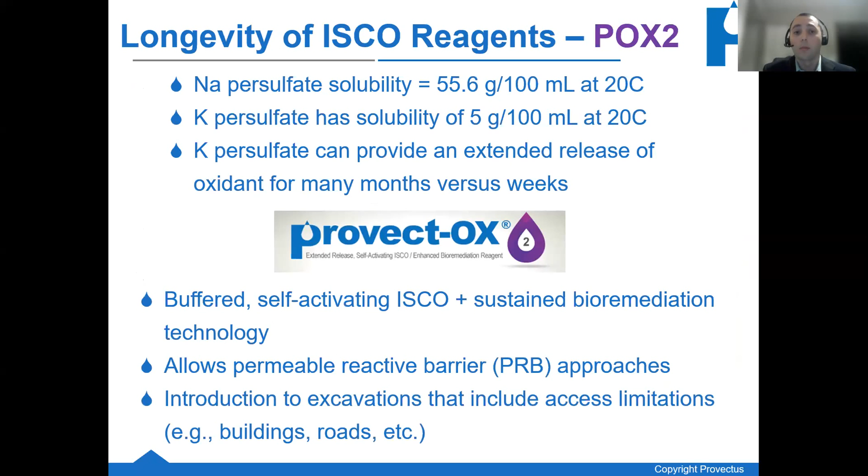Let's dive into a couple of case studies we have here. The first one, I'd like to thank Engineering and Land Planning for working with us. They're a firm based out of New Jersey, and this site's located in Madison, New Jersey. What the client did initially was an excavation of the overburden, but this was limited due to the depth and the building on site. They also performed an EFR event on the front end to remove most of the LNAPL.

What this left us with for in situ work was approximately a 1,500 square foot area, with our target vertical zone from 25 to 40 feet below ground surface. The depth to water at site was about 30 feet, so we were targeting the smear and saturated zone, and the site geology consisted of dense silts and clays. The contaminants of concern were BTEX and trimethylbenzenes, along with a little residual LNAPL in one of the two wells. We applied 8,500 pounds of Provect-OX in order to significantly reduce the contaminant mass.

One of the key takeaways is that the business was allowed to remain active and open during these injection activities.

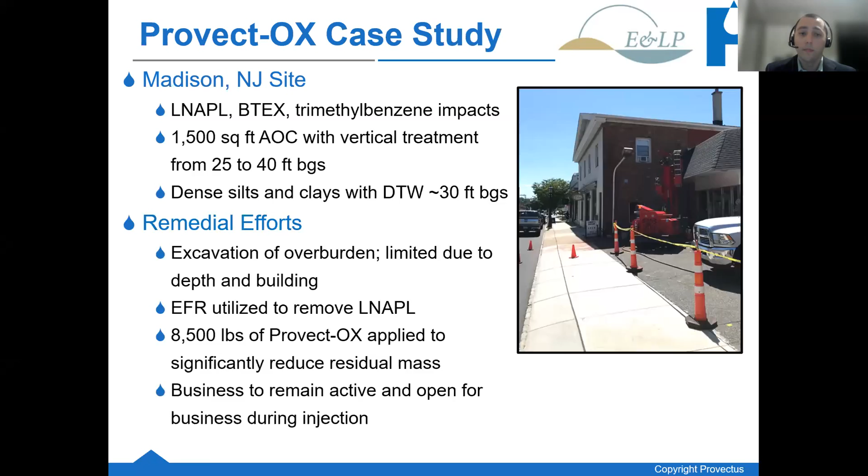Before we get into the VOC data, we do have some geochemistry. From the baseline conditions in our two target wells, we see that initial conditions were strongly reducing, with ORPs being greater than negative 100 millivolts. Following the application, the geochemistry quickly flips to aerobic, with one well going as high as plus 354 millivolts. About 3 months post-application, the ORPs return back to their reducing conditions, which is what we would anticipate based on the longevity of the oxidant. Then we'll have that sustained bioremediation with the residual sulfate and iron taking place on the back end.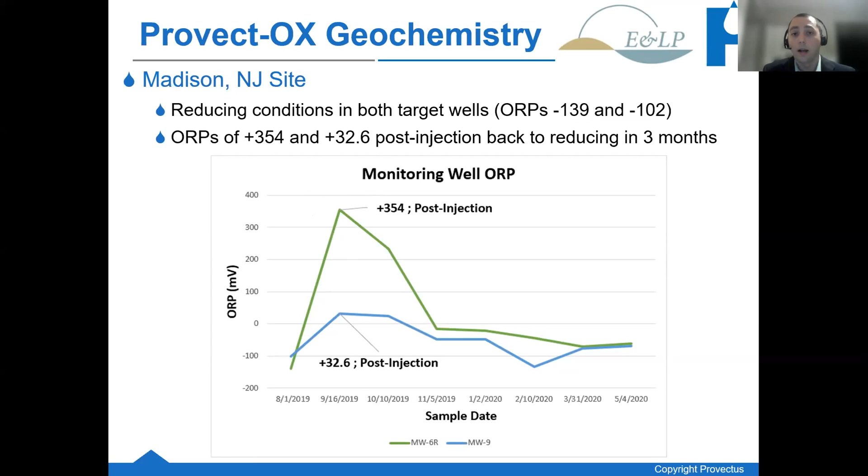Getting into some of the VOC data at MW6R, we can see reductions of greater than 90% for both BTEX and trimethylbenzenes. At MW9, this is the well where we had a little bit of residual LNAPL that was successfully remediated, and we had some higher starting concentrations here. The BTEX was reduced by approximately 96%, with the trimethylbenzenes coming down by about 85%.

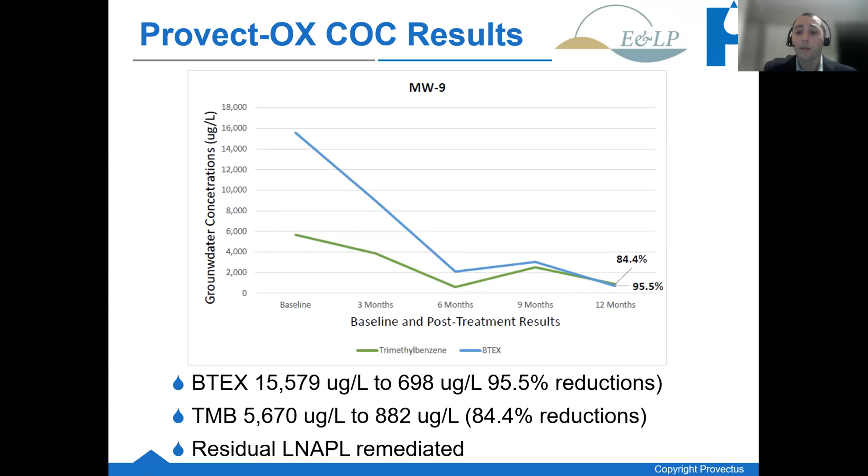The thing I'd like to note is that this is only about 12 months post-application. So even though the oxidation reactions have kind of run their course, we would still expect the bioremediation to continue for years to come on the back end.

The second case study is from a site on the east coast of the US. This was an excavation where they applied Provect-OX2 to the base of the excavation and blended that in with the residual soil and groundwater. You can see the picture here on the top right with one of our super sacks being opened and the Provect-OX2 being dumped out.

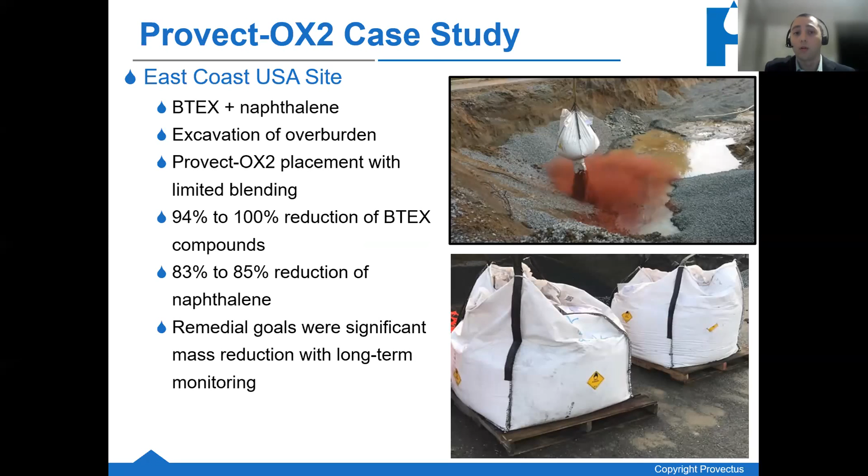We saw fantastic results at this site as well, with BTEX going down between 94 to 100% and naphthalene being reduced by about 84%. The client was very happy in the end, as the remedial goals for the site were just significant mass reduction with long-term monitoring. So I thank you for listening to my presentation today.

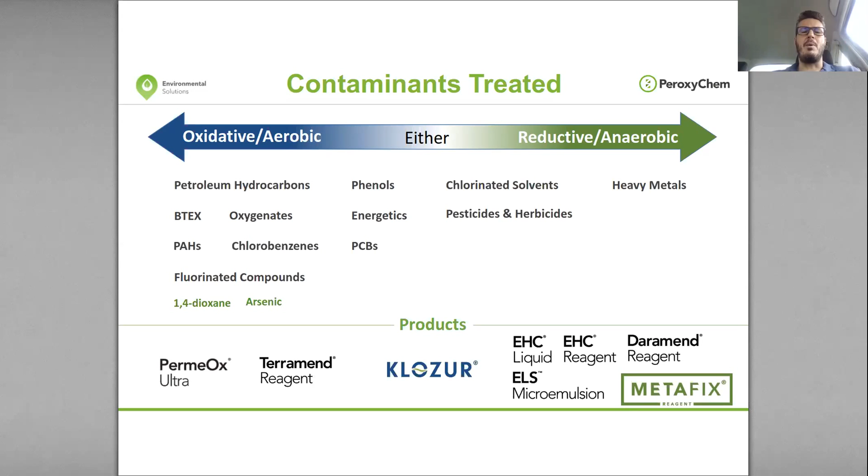In this slide we can see an overview of the Peroxychem treatment technologies along with the different typical contaminants that we can find on a site. We can observe how the Klozur technology is the one we are going to present. It's between the hydrocarbon family and the chlorinated solvent family, because thanks to the activated persulfate, we can treat both organic contaminants on a site, in groundwater, in soil, or in both components. Please, the next one.

Okay, this is the slide about Klozur. The Klozur family is based on sodium persulfate and consists of several high-quality environmental grade persulfate products used for chemical oxidation of contaminants in soil and groundwater. Please, the next one.

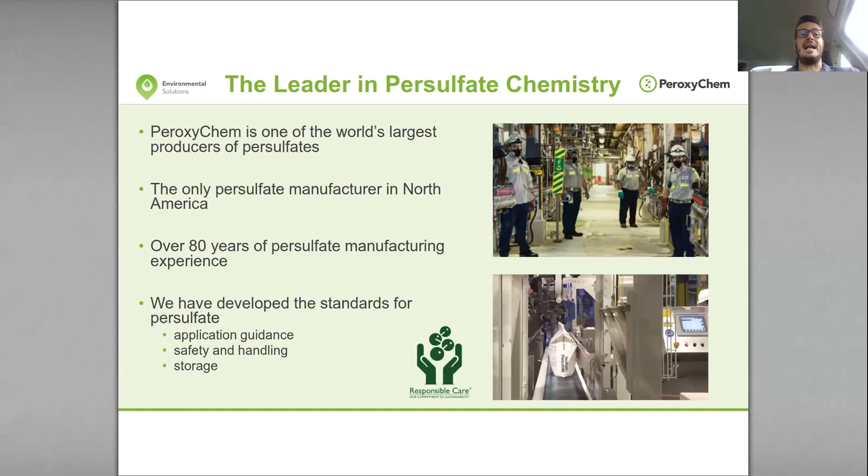We produce Peroxychem, which is leader in persulfate chemistry with patented technologies, and is one of the world's largest producers of persulfate. We have facilities in North America and in Europe, and we support clients in applying persulfate in the best way possible. Please, next one.

Here is the Klozur portfolio. In particular, we can see 4 different products. We have Klozur SP, the pure sodium persulfate. When you apply pure sodium persulfate, you need to use an external activator in order to maximize the efficiency of the reagent. Klozur One is sodium persulfate with a built-in activator, so everything is in the product and you don't need external activation.

Klozur KP is the potassium persulfate. It's a particular persulfate that lasts in the media up to 6-9 months after injection. And the last one is Klozur CR, where CR is the acronym for combined remediation.

Klozur CR is approximately 50% sodium persulfate and 50% calcium peroxide. So when you apply this product, you have at the same time chemical oxidation and aerobic bioremediation, and the calcium peroxide of the product can activate the sodium persulfate. This is the technology that has been applied in the next case studies. Please, the next one.

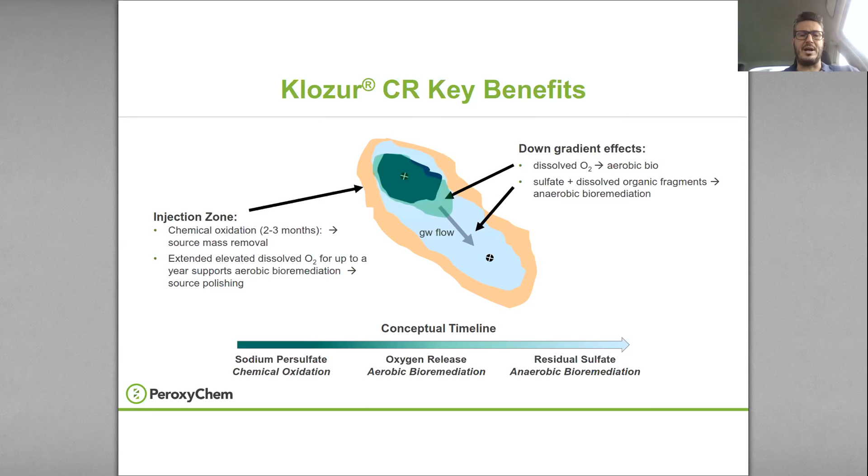Please, the next one. So the product can last up to 9 months with just one injection in groundwater for treating the contaminants. The product can be applied for treatment of the contaminated saturated zone. We can use common injection tools such as direct push, fracturing, or fixed wells. However, we don't recommend fixed wells because the calcium peroxide can clog the drain of the well. So in case we want to use fixed injection points, we recommend, for example, manchette tube technologies.

And lastly, Klozur CR can be used at the bottom of the excavation pit, in order to treat the residual contamination after the excavation of the most contaminated soil. Please, the next one.

Okay, the technology has been successfully applied in a very contaminated site in the center of Bologna. Please go ahead, Marco.

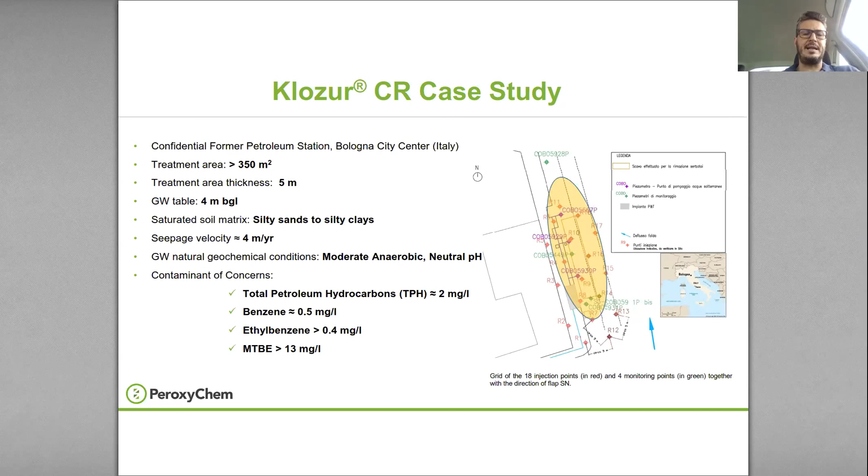We performed two different injection campaigns: the first in February 2018, the second in April 2019. In both cases we applied the product through 18 injection points distributed in a grid in the most contaminated area. During the first campaign we applied approximately 190 kilograms of Klozur CR per point; in the second campaign, 160 kilograms per point.

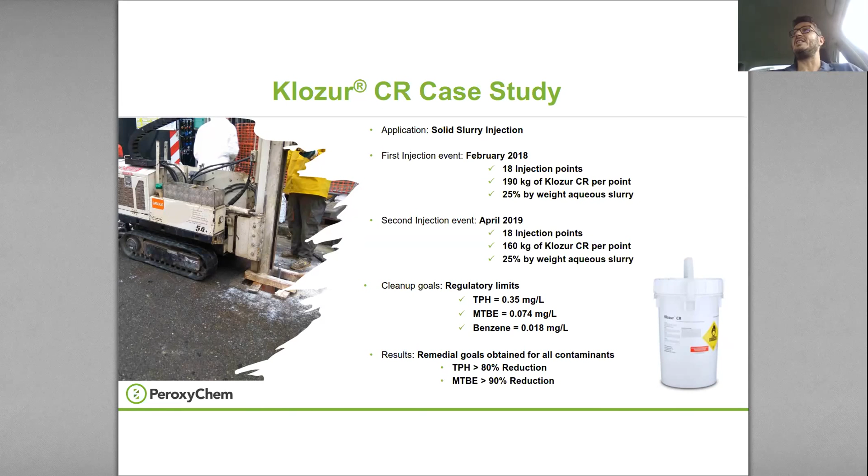For total petroleum hydrocarbons, after the first injection campaign we saw an increase in contaminant concentration due to the alkaline condition, which tends to desorb the hydrocarbons from the soil matrix. This is actually helpful for remediating a site, because you remove the secondary source - that's one of the main reasons you see a rebound effect.

After the first injection campaign, we still observed contamination levels above the limits in some monitoring wells, so we performed the second injection campaign. After both injection campaigns, we reached the cleanup goal in all monitoring points for total petroleum hydrocarbons.

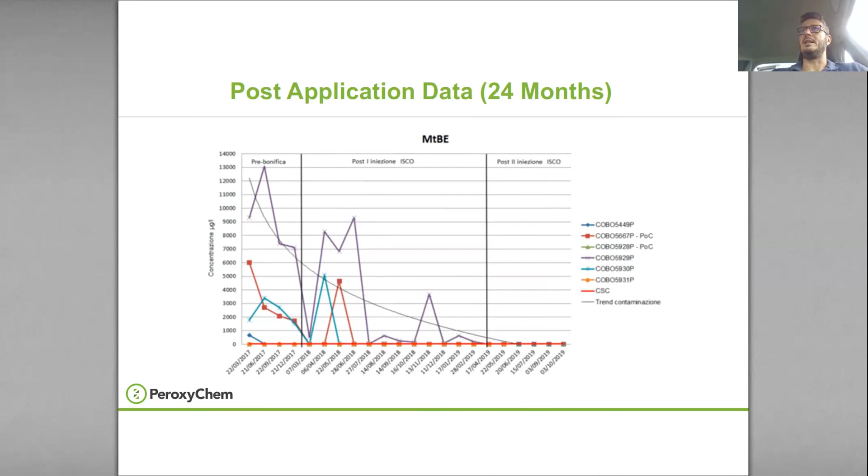Same results for MTBE and benzene. We reached the cleanup goals after the second injection campaign, observing the same phenomena as after the first - several oscillations in groundwater contamination levels due to desorption of contaminants from the saturated soil matrix.

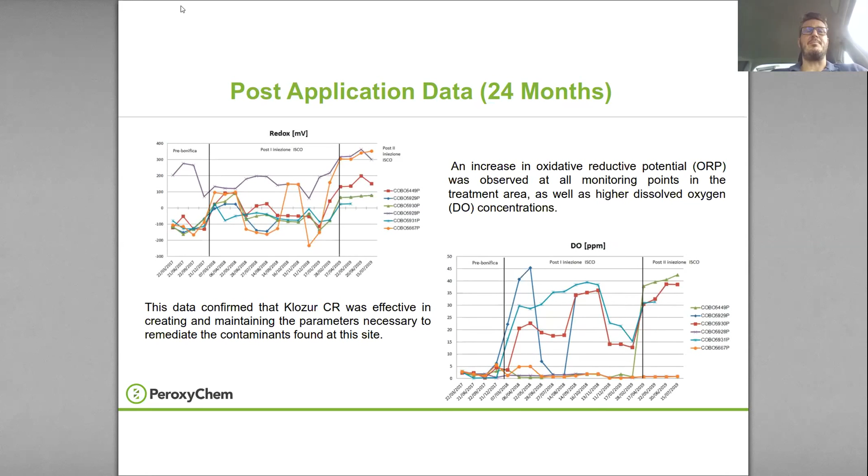We also monitored field parameters to verify the good distribution of the reagent in the aquifer, in particular the redox potential and dissolved oxygen. In both cases we measured an increase in redox potential thanks to the oxidizing condition of the reagent, and the same for dissolved oxygen, due to the slow oxygen release from the calcium peroxide component of the product.

In conclusion, Klozur CR has been successfully applied at this former petrol station in the city center of Bologna. We demonstrated how persulfate chemical oxidation can be successfully combined with aerobic bioremediation to treat petroleum-based contaminants. The combination of persulfate and engineered calcium peroxide, such as Permeox Ultra - which makes up 50% of Klozur CR - can provide quick ISCO and long-term enhancement to aerobic bioremediation.

Klozur CR lasts in groundwater up to 9-12 months with just one injection, allowing treatment of the contaminants in groundwater with no stress on the bacteria population.

In this case, the remediation goals were achieved in all the main monitoring piezometers of the treatment area without any rebound effect, demonstrating good distribution of the product and successful treatment of the contamination. Monitoring data confirmed high levels of oxidant reduction potential and dissolved oxygen were sustained to support continuing enhanced aerobic bioremediation.